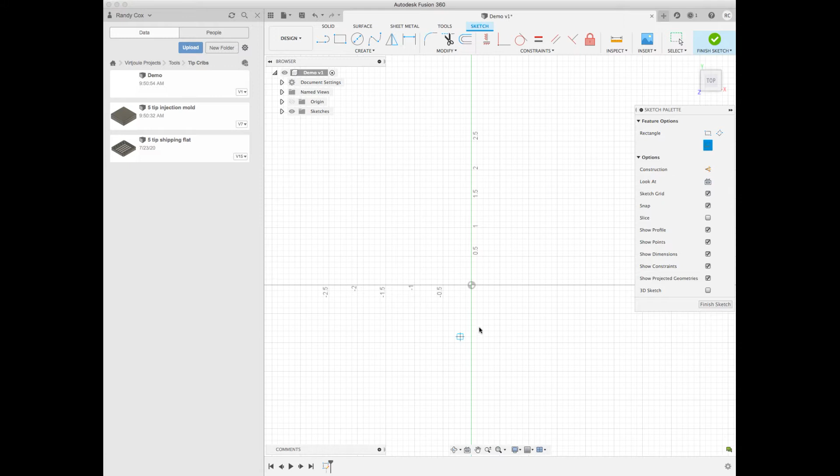I'm going to show you how I do a core cavity mold design in Fusion 360. First I create a sketch. I lay down a square that's the size of my mold blank, which is 4 inches by 4 inches.

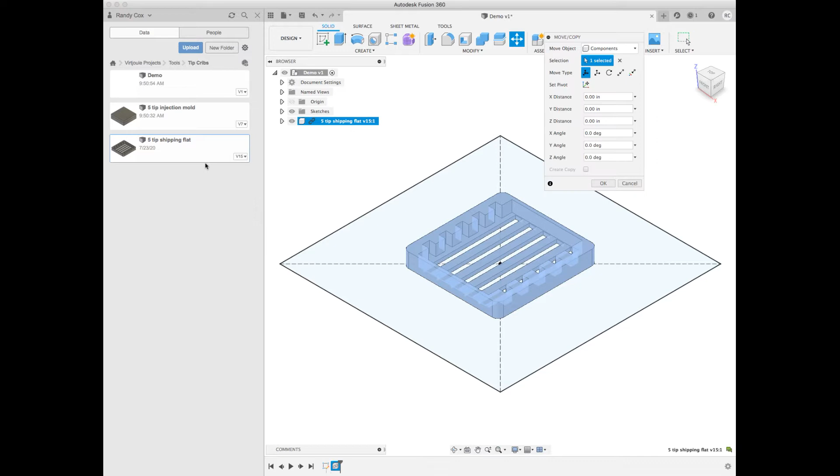Okay, we'll finish up that sketch. Now we're going to insert the part that we want to mold, and this is a little part that I use for a product I sell on Amazon.

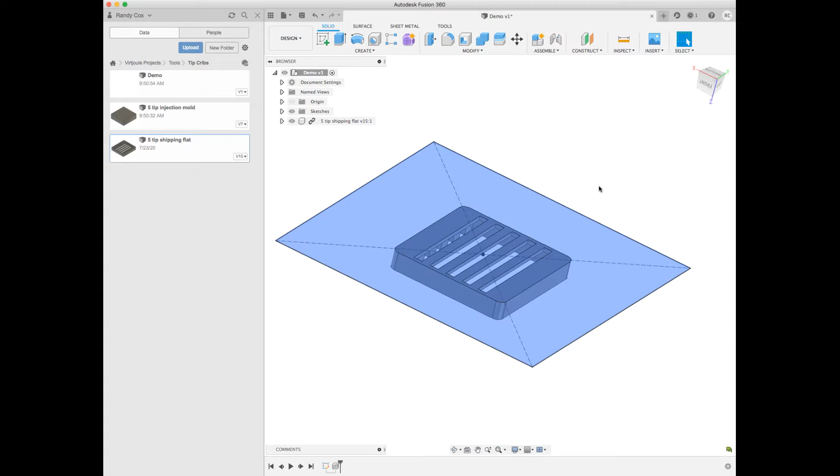We're going to try to do this like you were squishing this into a pile of Play-Doh or putty and pulling it back out, and that would kind of be what you would think of as your mold. So we're going to flip this over.

Go ahead and extrude the mold blank to 0.75 inches, which is the size of my stock. Now you see the bottom of that part kind of showing at the main level.

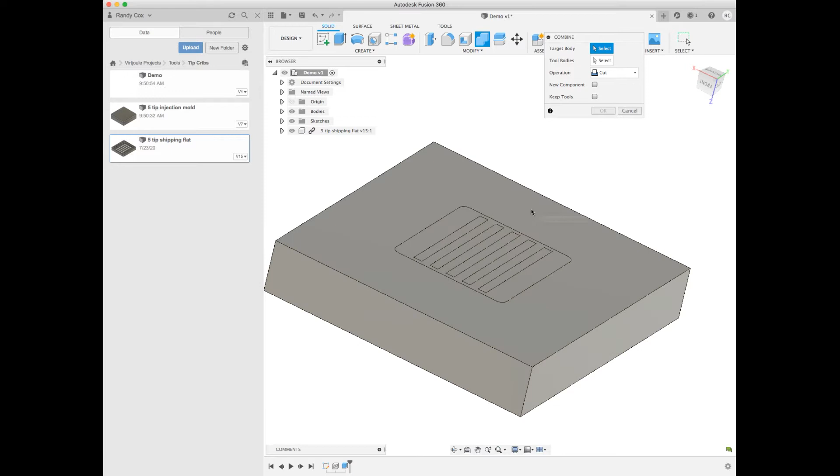Next thing we want to do is to actually use the combine feature to pull that part out of the mold so that what is left is the negative. So we're going to use combine and then the cut feature.

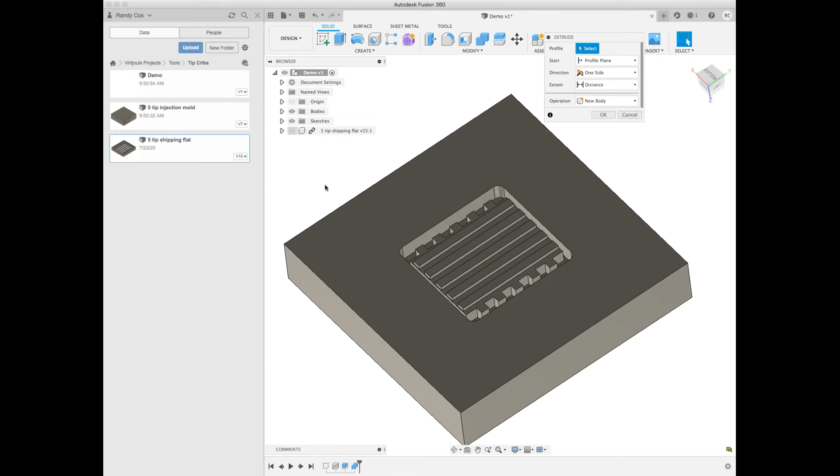Now I'm going to turn off the component so we can see what the negative looks like. This is what the core cavity mold would have in it if it had an infinitesimally small lid on it. So everything that you see there, with the exception of the sides, is what you would call the core side of the mold.

So what we want to do next is to extrude that down and expose the core, taking away the sides. Now what we have is the true core of the mold.

Let's start working on the cavity now. We'll go ahead and name this body the core so we can get back to it and know what it is easily. Now we're going to create a sketch on the top plane of the core side of the mold.

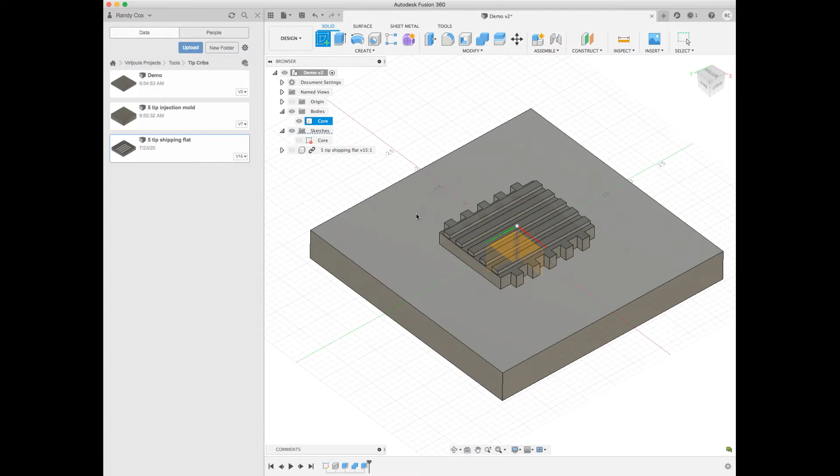And this is where the cavity start will happen. So we're going to create another sketch here that's also 4x4.

Now we're going to extrude this cavity, and what we're going to want to do is to have a cavity without the part inside of it. So if we went ahead and extruded it, you would see it would take on that part.

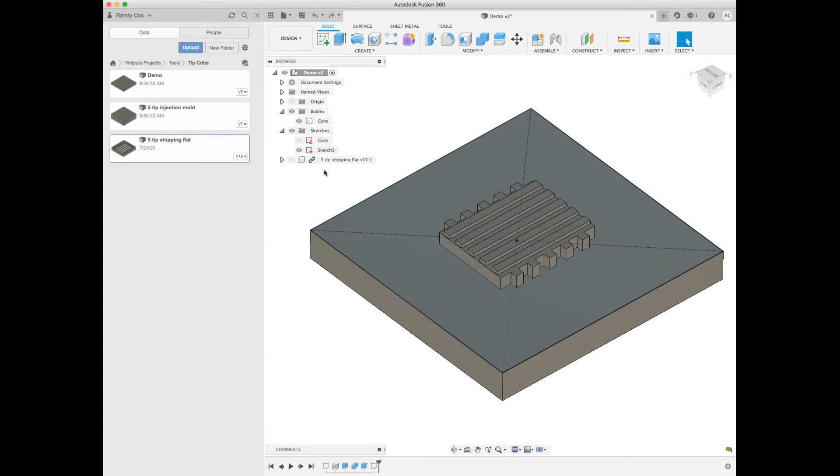We're going to go ahead and shut off the core side of the mold, so all we see is the outline of the mold top, and so we'll select both those areas and then we'll extrude that to 0.75 as well, because that's the size of the mold on the top side.

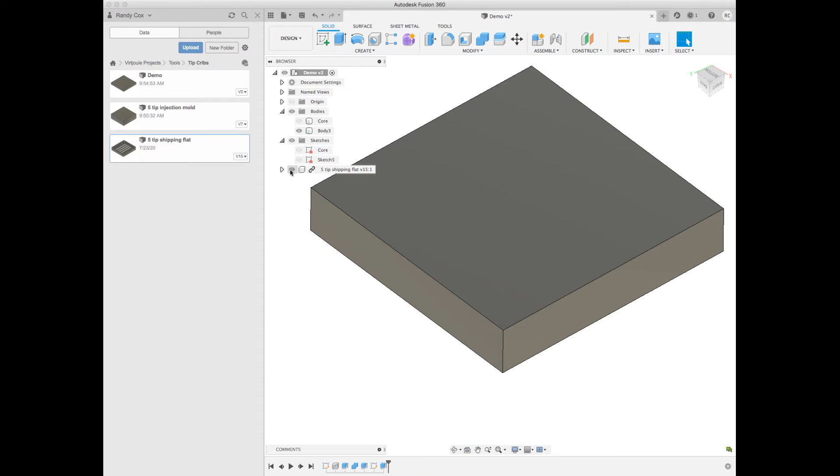Now we want to flip this around, and we turned on the component again so you can kind of see the top side of the component just right at the top level.

What we want to do is to figure out how to get the cavity side of this, where it's just the outline, into the mold.

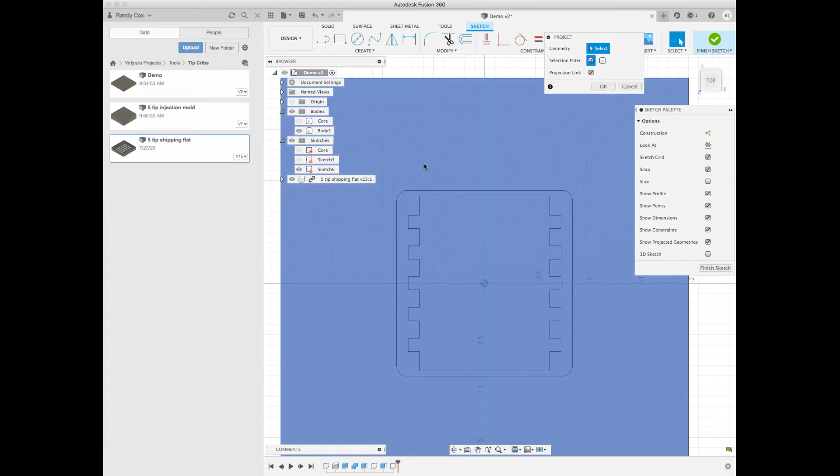So we're going to use the project feature of Fusion 360 in the sketch, and we're going to just select the line segments around the perimeter, and then that will transfer the shape of the perimeter onto the sketch.

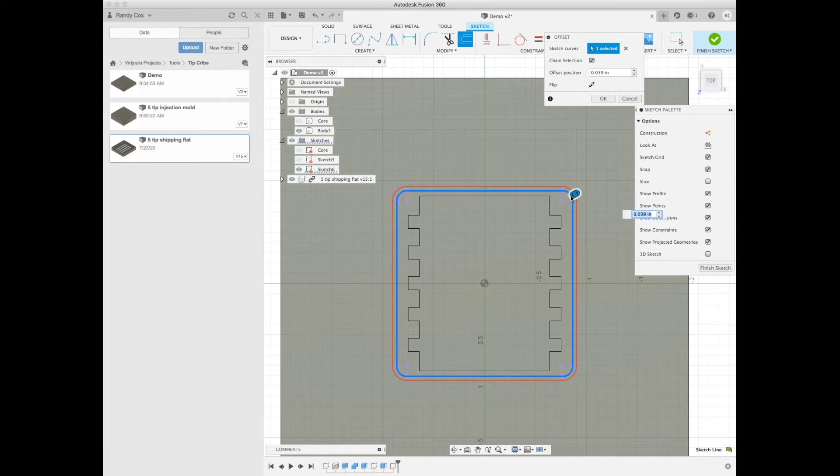At this point I have the shape of the outline of the cavity, which is great, but given that plastic will shrink, what I want to do is make this cavity slightly larger than it would normally be for the exact size of the part.

So we're going to add another few thousandths of an inch on there, and if you zoom in real close, you should be able to see a little bit of an extra outline that we're going to pick, and that'll make the cavity just ever so slightly larger.

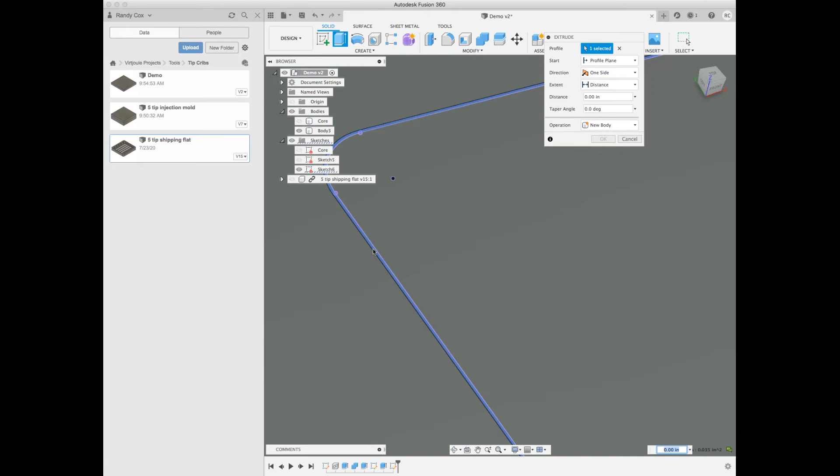So we've got that offset now, and then we're going to select the offset plus the interior space, and we're going to extrude that down, and we know from the part dimensions that the height of that part is 0.26 inches.

Now we are going to go ahead and turn on the core side of this mold to kind of put it together. You can see now what I'm showing is that the shorter side is the core side, and the taller side is the cavity side.

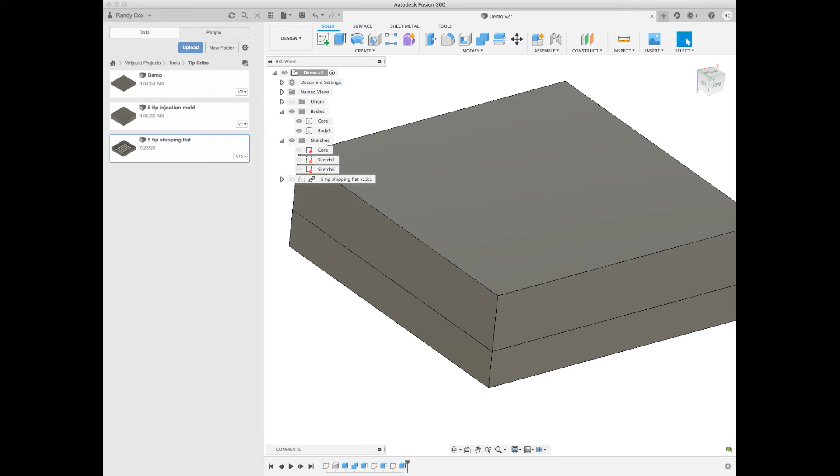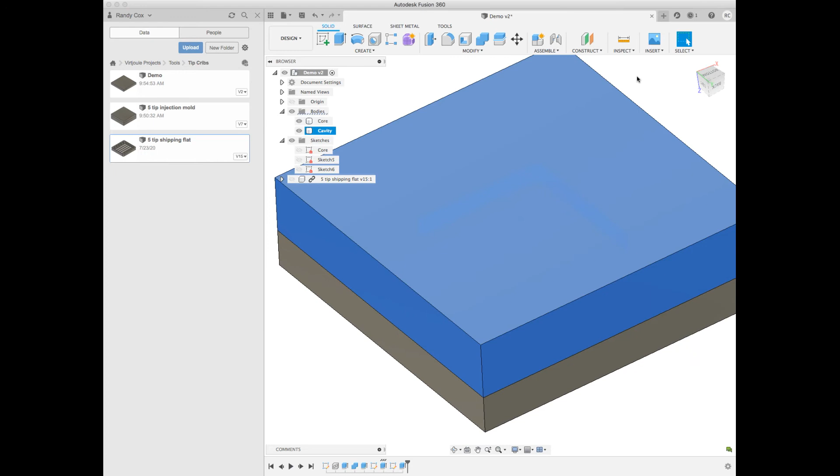Now we want to take a look inside and see if it looks like we think it should. We've renamed the body to the cavity so we can come back and take a look at it. We'll use the section analysis tool to see what we have in here. I pick that out of the measurement, and then we can run the section back, and this gives us a good idea to make sure the bottom of the core is touching the top of the cavity and that sort of thing. It looks okay to me.

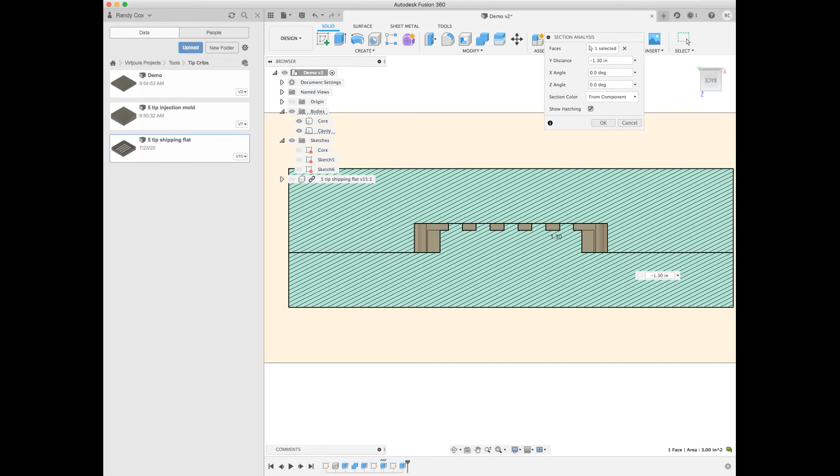Let's jump back to the core side of the mold and start adding some features that help make this a usable mold. We're going to put in some guide pins now, on the top side of the base of the core side here. I found that 5/16 of an inch is a pretty good size for guide pins, whether you're milling them in or using them as steel pins.

If I can mill the guide pin in, that's typically what I'll do. It turns out to be faster and more straightforward, and then you don't end up using any steel pins. Usually I'm not doing so many turns that those ever wear out or anything like that. So we'll go ahead and mill them in.

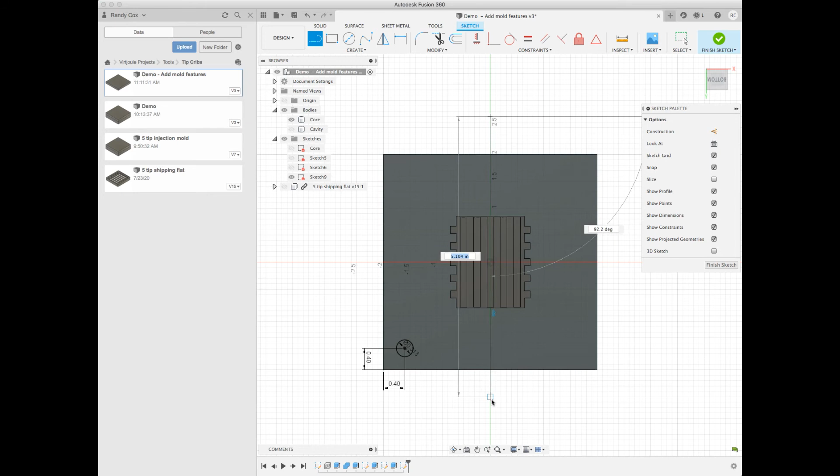This is going to be an aluminum mold, and we'll put the pins 0.4 inches from the corners. Then I'll go ahead and put in a construction line, going in both directions, so we can start to do some mirroring here. That ensures that things get in the right place, and we'll have 4 pins here in a second.

So I'll bring up the mirror functionality. I'm going to select the circle for the guide pin that we just created in the sketch, and that'll be the object, and then we need to click on that center line, which is the mirror line. Click OK, and then you'll see the one over in the lower right corner show up.

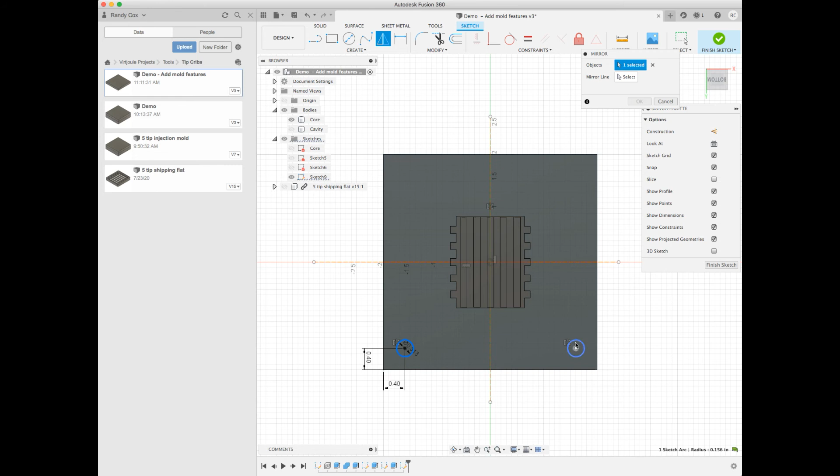Now we're going to do another mirror line horizontally through the piece, and we'll turn that into a construction line. And now we'll go ahead and select mirror again, and we'll pick the bottom 2 circles and mirror those across the horizontal line, and that'll give us 2 guide pins in the upper section of the mold.

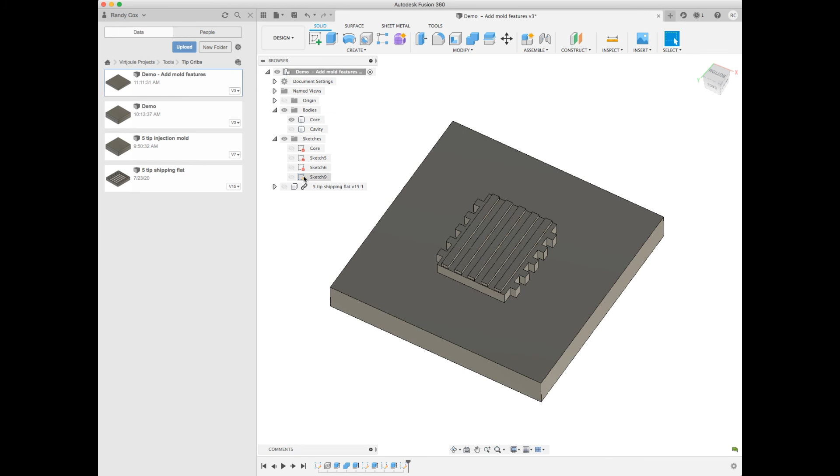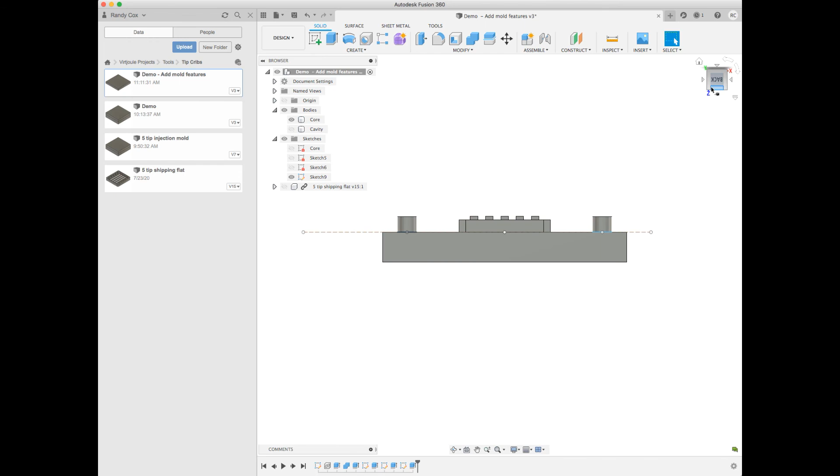Okay, now we want to raise the guide pins out of the mold. So we'll make sure that sketch is turned on, and then we'll select the extrude functionality and pick all of the circles for the guide pins. Then we're going to raise those about 0.25. That feature in the middle is 0.26 at its highest, and we definitely do not want the pins to go beyond that. So we'll make them just a little bit shorter, and they'll still work fine as a guide.

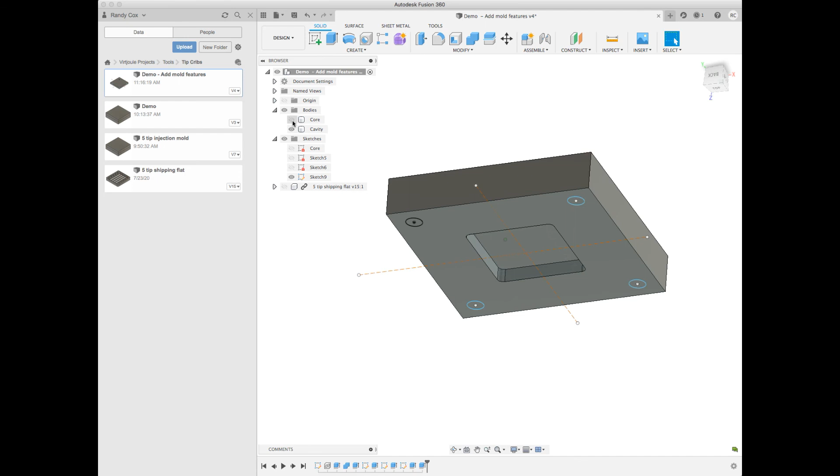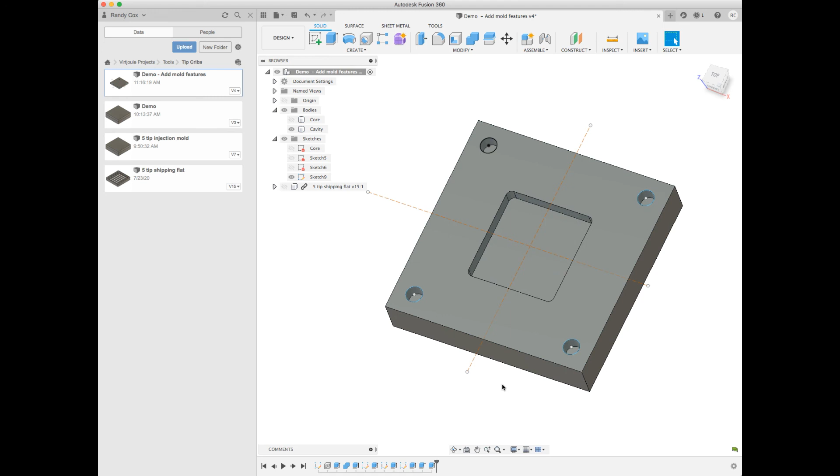Now we'll do the same for the cavity side, and since that sketch I did for the guide pins is right at the boundary, we can use the same sketch to extrude into and cut out the guide pin holes in the cavity section. Now these are going to be exactly the same size holes as the guide pins are, and so in the real world those would probably not slide together. What I usually do is make them the same size, and then use the milling operations to take a little bit more of the lateral stock until we get that fit.